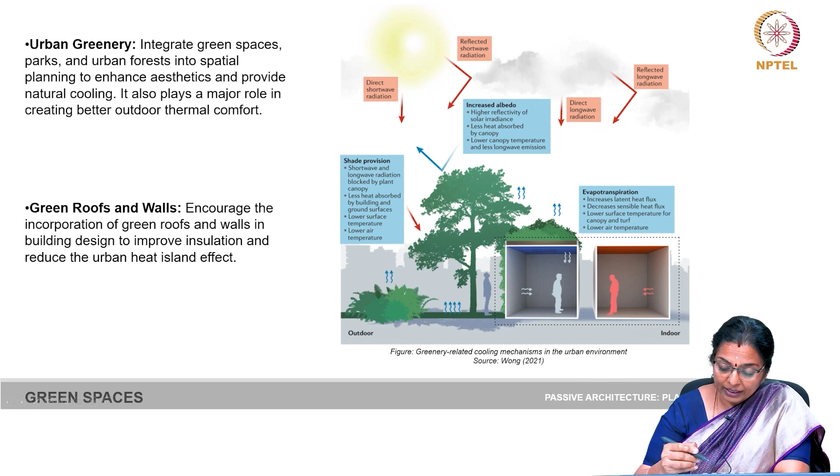So, when you have a settlement, you need to be very conscious in planning it to ensure you have adequate greenery and adequate open spaces.

So your outdoors are green, because short wave and long wave radiation get blocked by the plant canopy, and less heat is absorbed by building and ground surfaces, because this greenery on the wall is insulating the house. This greenery prevents solar radiation from hitting the wall, and you will have lower surface temperature if you have sufficient ground covers, and lower air temperature if you have sufficient shrubs.

Evapotranspiration increases latent heat flux and decreases sensible heat flux. It lowers surface temperature for canopy and turf, and it lowers air temperature. This roof garden aids in many ways.

You should understand that there is direct shortwave radiation and reflected shortwave radiation, and there is direct long wave radiation and reflected long wave radiation. A building can get insulated from all of these if it has a lot of vegetation. Less heat is absorbed by canopy, resulting in lower canopy temperature and less long wave emission.

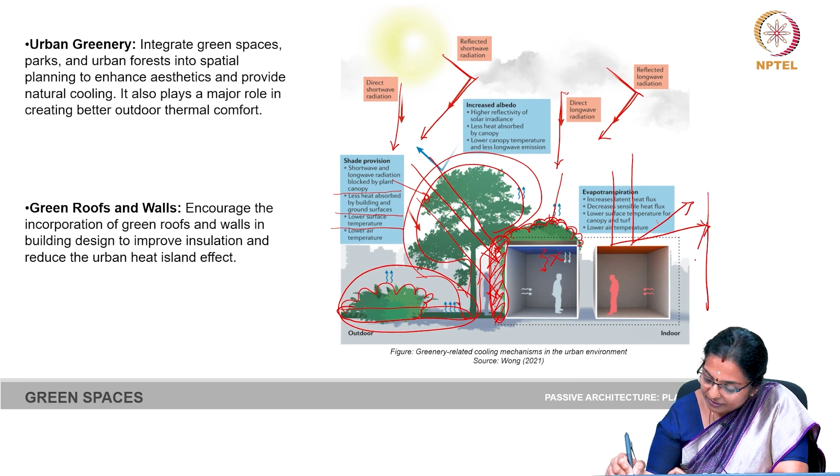If you do not have a green roof, the radiation gets reflected. Multiple reflections happen on adjacent buildings, then on the ground, and so on. When all the buildings do that, the roads and the grounds become very warm and hot. In a particular area, if all the roads reflect this, it especially happens in the evenings, because during the day these roads also absorb a lot of temperature. To reduce this impact, we must have cool roofs.

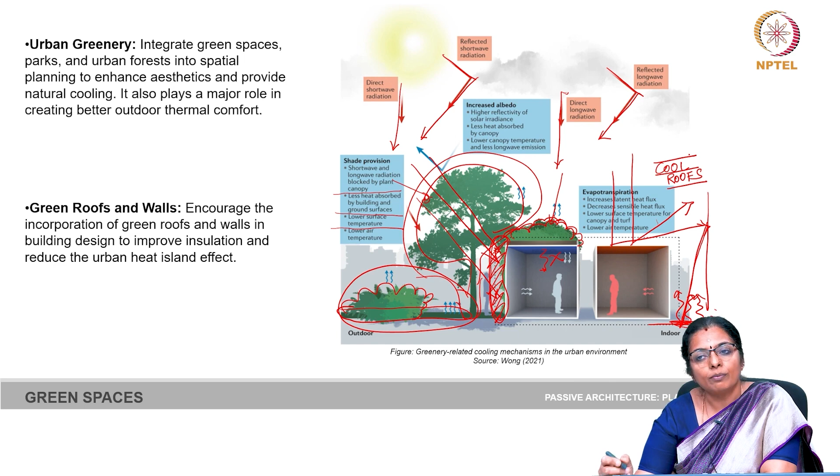So, cool roofs are another strategy that we can adopt, not only for insulation of the building, but also to protect the entire settlement.

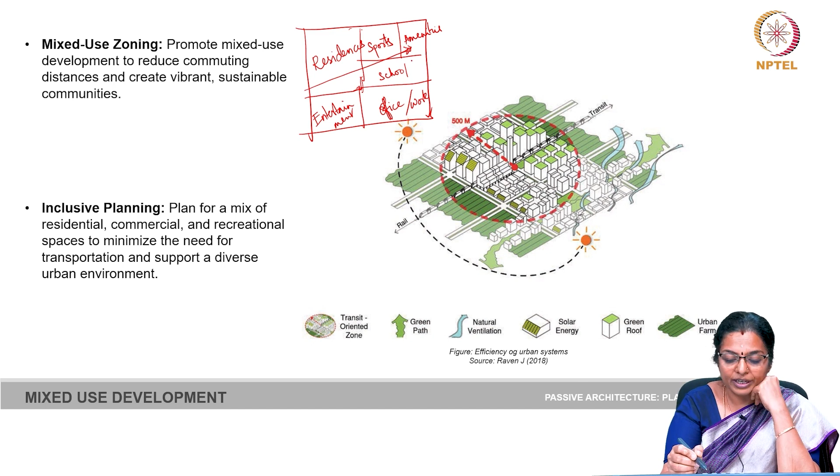If you have exclusive land use, it is found that there is a lot of transportation and movement from one zone to another, even for basic things, say to get a small product or vegetables on a day-to-day basis. People have to commute long distances. If you want to reduce this commutation, why must we? Because having too much commutation entails vehicular movement, and vehicles emit a lot of GHG. It is also found that exclusive land use demarcation doesn't really work, especially in the Indian situation, because we are not grown up with that.

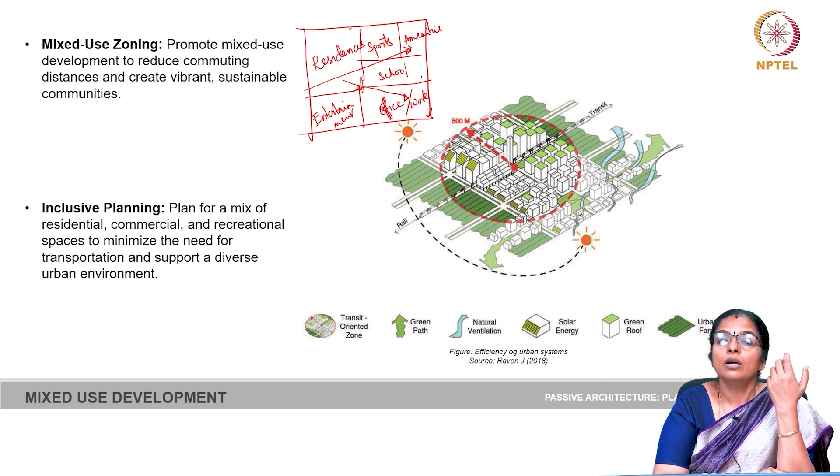We always have a small shop, a shanty shop at the end of our street. The puncture shop is there, the iron wala is somewhere very close to our house, and that is how it works. But if you start having a planned settlement with exclusive land use, it entails a lot of movement, and also, because of the transportation, it fosters communities that are not pedestrian friendly. So if you want to avoid that, you must reduce commuting distances, make your settlement more walkable, and plan to foster vibrant, sustainable communities.

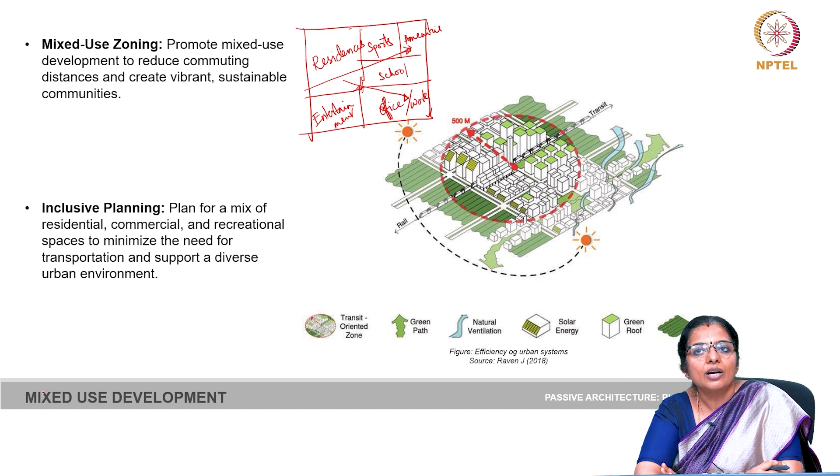This involves planning for a blend of residential, commercial, recreational, educational, and health facilities in close proximity. Inclusive planning, as part of this approach, aims to minimize the need for transportation and create a diverse urban environment. The synergy between mixed use zoning and inclusive planning contributes to more sustainable, walkable, and socially dynamic communities. This strategy aligns with principles of smart growth and encourages collaboration among urban planners, developers, and the community to enhance the overall livability of urban areas.

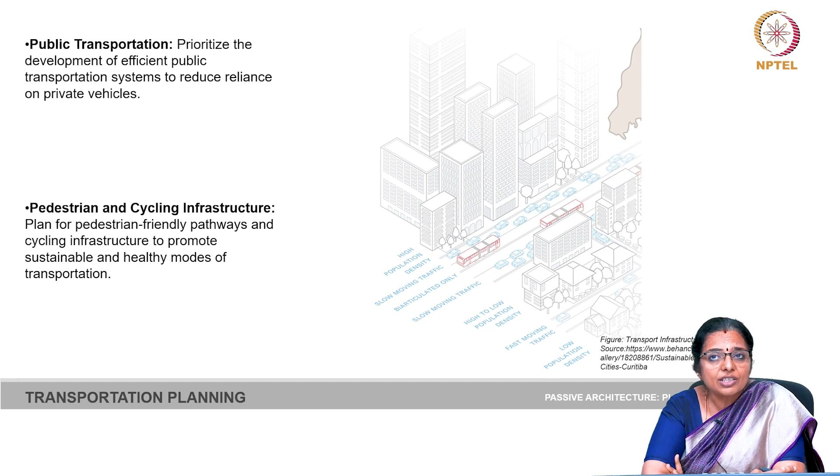Now, transportation planning is a strategy that involves prioritizing the development of efficient public transportation systems and planning for pedestrianizing and cycling infrastructure.

Emphasizing public transit aims to reduce reliance on private vehicles, addressing issues such as traffic congestion and environmental impact. Simultaneously, the focus on pedestrian and cycling infrastructure promotes sustainable and healthy modes of transport, contributing to improved public health, reduced air pollution, and enhanced community interaction and livability. The integration of both strategies supports a comprehensive approach to creating an efficient, sustainable, and people-centric urban transportation system.

When there is a need for very fast or long distance public transportation, the way out is mass transit systems. Mass transit systems entail things like the metro rail, trams, and public buses. We must prioritize the development of efficient public transportation systems and reduce the reliance on private vehicles.

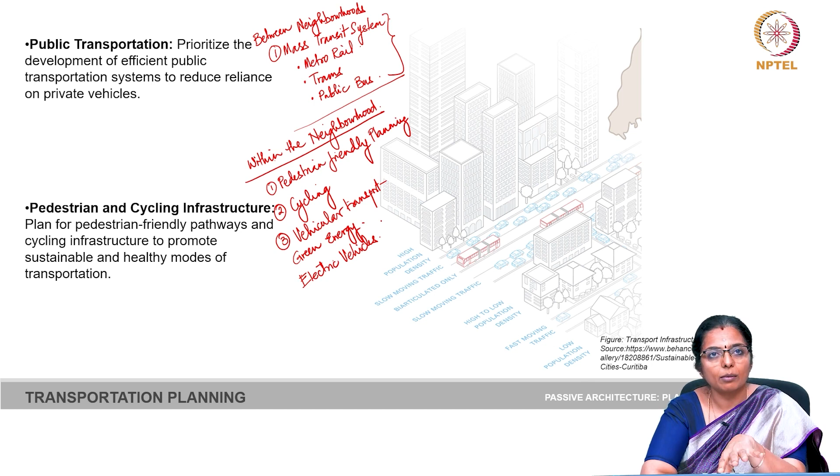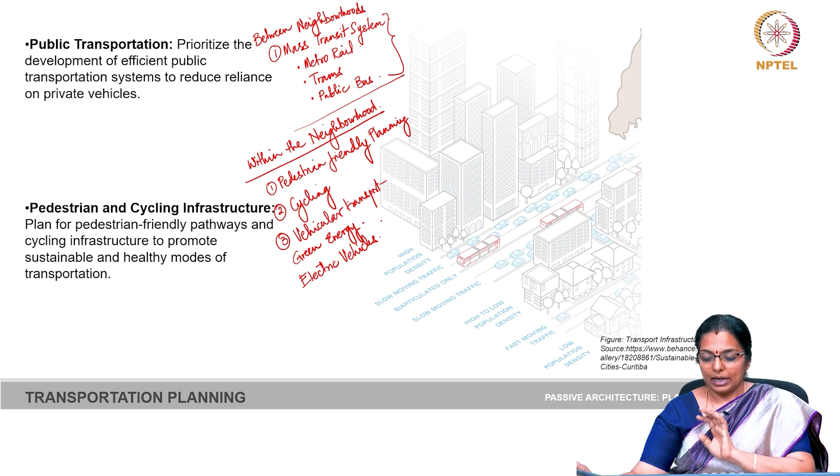We are not touching on low carbon settlements in much greater detail now; we are looking only at basics. As the class moves, we could probably do it. So integrating public transport between neighborhoods, focusing on pedestrian and cycling infrastructure, and battery operated or electric vehicles within the settlement will ensure that we have a sustainable setup.

Another important dimension we need to look at is water management. How do you implement sustainable water management strategies? We can implement sustainable water management strategies, first, through rainwater harvesting. We need to harvest the rainwater, which can happen in two ways. One is we can collect the rainwater and use it.

So we can do rainwater harvesting, and that can happen through collection of rainwater, or directing the rainwater to pits, which therefore recharges the aquifer.

Then other strategies can include having permeable surfaces instead of surfaces through which water cannot seep inside. You can have surfaces made up of permeable materials, and then, very importantly, you must reduce water consumption. How do you do that?

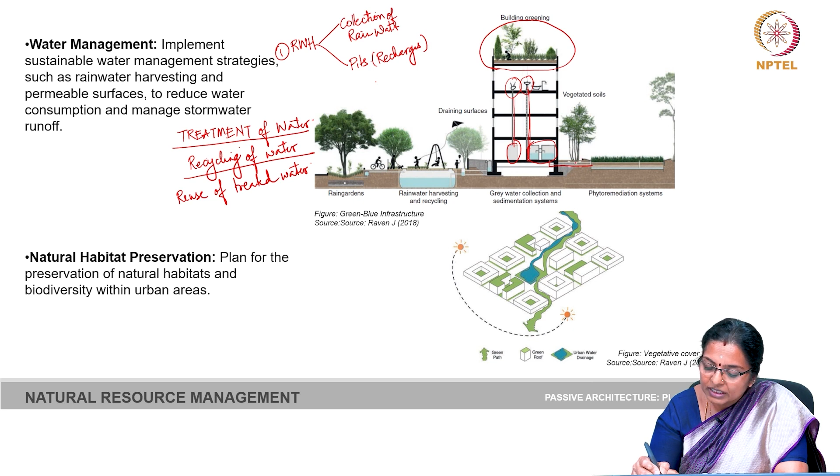There is grey water which comes from the wash basin and the bathroom, which again is collected and treated, and this water goes for watering the plants and trees and all that.

Here you can see permeable surfaces, and here you have a rainwater collection pit from which it gets treated and the water is stored. So you have rainwater harvesting and recycling, rain gardens, grey water collection and sedimentation system, and phytoremediation systems, also called root zone treatment.

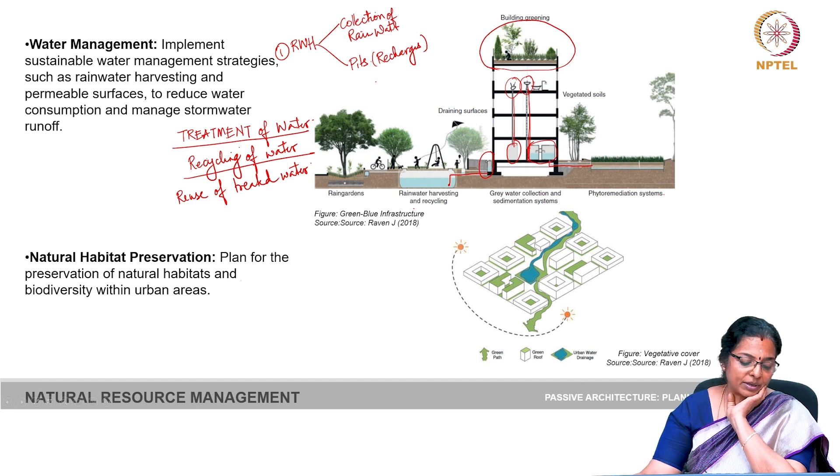So this is the green-blue infrastructure. We should also have a plan for preservation of natural habitats and biodiversity within the urban areas.

Climate responsive design considers a design to address regional climate conditions, incorporating strategies for extreme temperature, humidity and precipitation. Thermal comfort in a climate responsive design aims to enhance thermal comfort by incorporating features such as shading, insulation and natural ventilation by adapting to extreme temperatures.

Energy efficiency is achieved by designing buildings and infrastructure in alignment with the regional climate, which reduces the reliance on mechanical heating or cooling systems, thus promoting energy efficiency. By considering the local climate, designs become more resilient to extreme weather events, contributing to long-term sustainability.

Microclimate planning must not be neglected, and we analyze and plan for microclimate within the urban environment, understanding how the built environment influences local weather conditions.

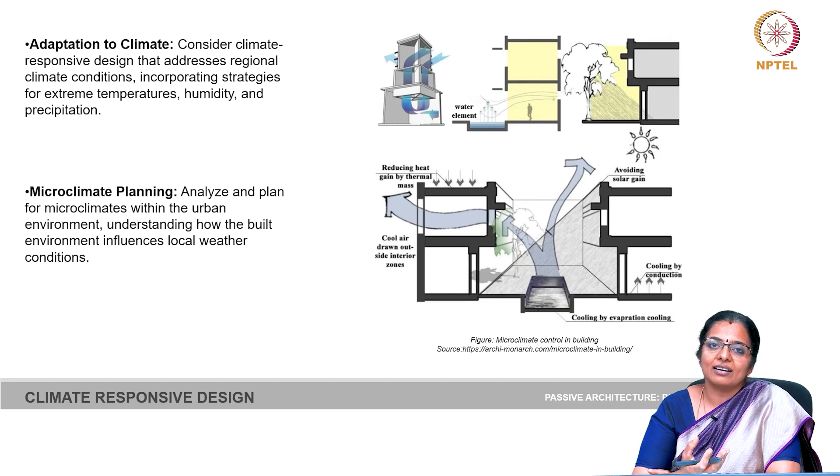With this understanding, I will close today's lecture and we will continue again for a new topic. Thank you.